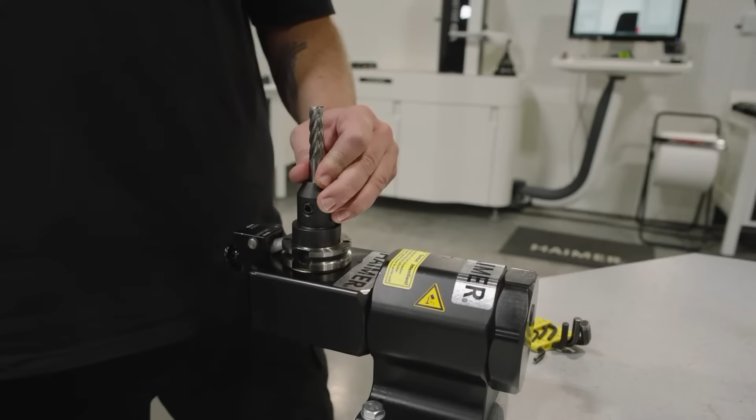Was it your idea to set up the station this way? Titans. Titans. So yeah, he was very specific about what he wanted, and I really liked what it did. Yeah. So you're getting this tool set up. Yeah, we're gonna go make some chips.

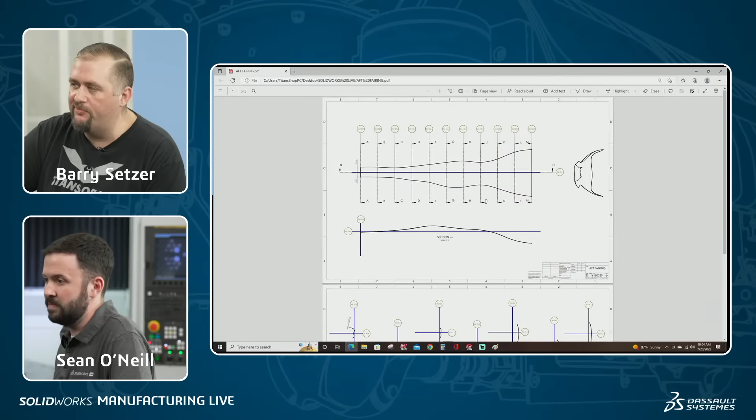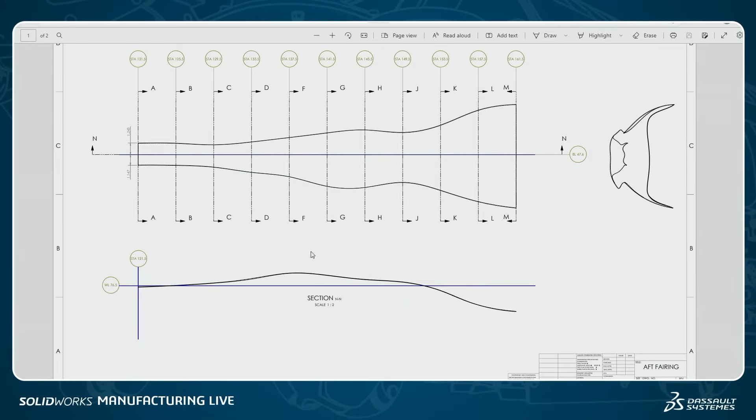If you want to take a look at a typical aerospace drawing for a pure contoured part, you have all these sections here with very few dimensions. They'll give you three planes: a waterline plane, which is the distance from the tarmac vertically; station planes going down the aircraft horizontally; and butt line, which is from center of aircraft outward. So it gives you planes that define where the part ends up in space, plus a bunch of section views - it's all curvature, so how do you model that without taking thousands of measurements for every little arc?

I did a part that was very similar to this - I've probably done hundreds of parts similar to this. In aircraft drawings, they'll usually give you something to scale the drawing. In this case, we have a grid, with station lines that are all 4 inches apart. So they gave us enough information to model this part, even though it's an undimensioned drawing.

It's crazy - some drawings I've seen, and some you've showed me, are 40, 50 years old. It can be really hard, right? It's like I can't access the person that made that drawing initially. I wish I could, and there's such an abundance of crazy amounts of information.

Dude, 50 years ago the FAA had very different standards than what they have today. So there have been huge assemblies that I've modeled, and then you find out that none of the parts go together the way that they were drawn. It's like, well, how have you guys been building this aircraft for 50 years? And it's kind of neat because at some of these aircraft companies you can find people that worked there 50, 60 years ago that still work there.

I remember one time in particular I was doing a main landing gear door assembly, and I went out to the shop and there was this guy still working in the hand forming section. I said, hey man, these parts don't go together, how do you guys make this work? And he's like, well, we've been hand trimming those ever since this drawing came out. It's like, wow, okay, glad I caught you.

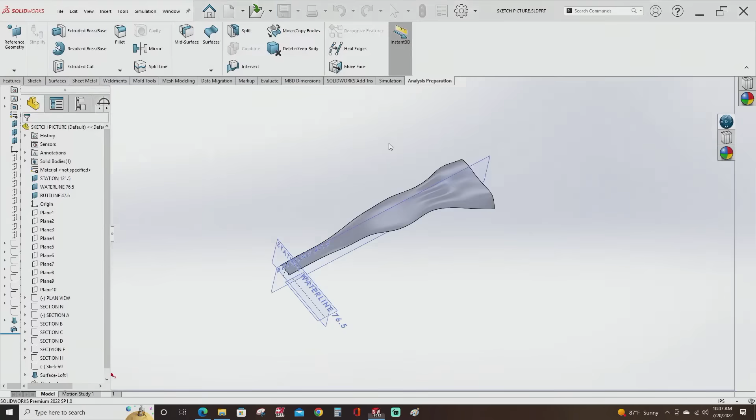One of the tools I like to utilize for a drawing like this is sketch picture. So if we open up this part here, you'll see that it's got pretty crazy contour to it. Yeah, it'd be very tough to model this unless you had a point cloud or a bunch of loft data you could use, but that drawing didn't have any of that.

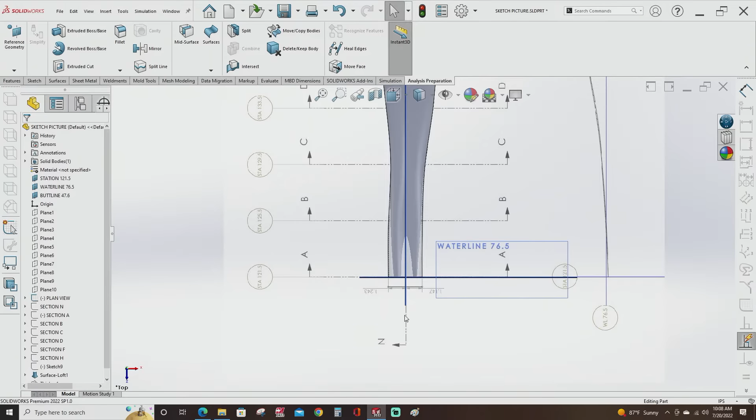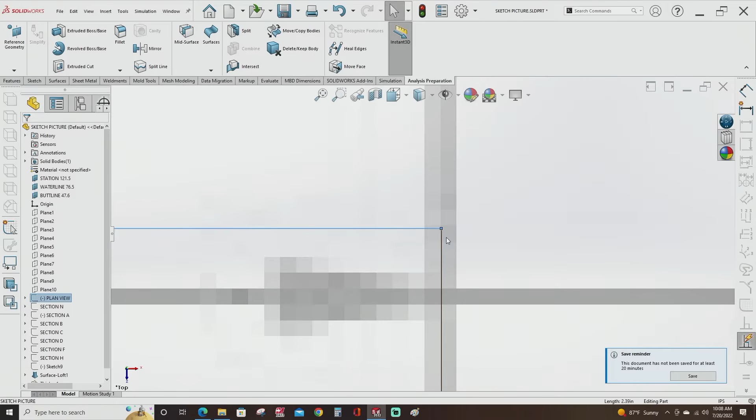So if we take a look at our plan view, the very first thing you have to do is get that drawing scaled perfectly. So we bring that picture in, but there's no telling if it's tiny now or if it's gigantic. Using these two dimensions that we had on the drawing, I just drew a sketch, dimensioned it, and then scaled the drawing to match that. You'll notice a lot of times dimension lines on a drawing will be 2 pixels wide, so what I almost always do is go to the center of those 2 pixels, and that hasn't failed me in maybe 20 years of doing this.

That's interesting. So you'll see here we got our first scaled version of our sketch picture. All we did was scale it, and this is just going to be kind of a checking tool to make sure that we got the outer contour of our part correct.

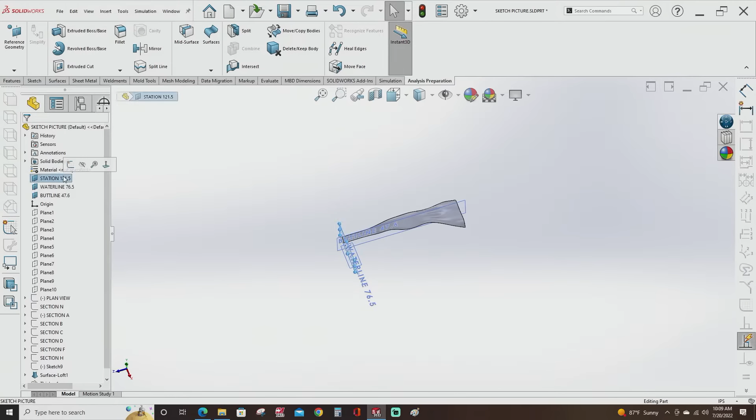I noticed you have a couple things from a Solidworks standpoint, like a lot of people, I like how you set this up, you seem to be very organized. It's like all my planes, but even further, right? The system-defined planes, like the 3 you have right up top above the origin, you renamed them. Are those dimensions you have there? Those are the 3 planes as defined by the drawing. So if you look, station 121.5.

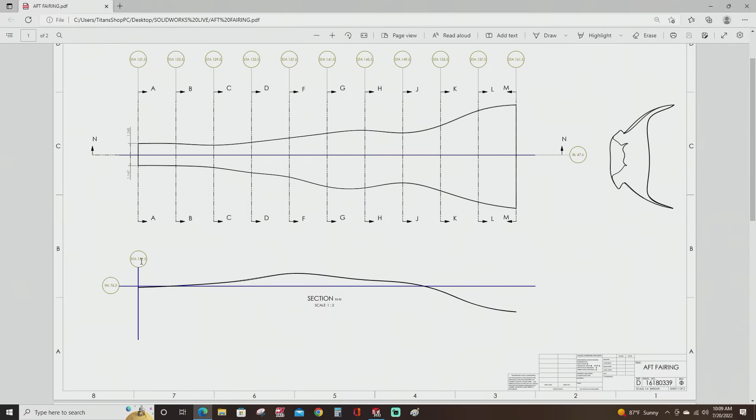That's going to be the station that defines the front end of our part. And then the same thing with the water line, 76.5, that's used in all the sections. And the same with the butt line, used in all the section views. So by naming those planes to follow the drawing convention, now we can mate those up in 3D space.

Okay, that makes sense. And most people that model aircraft parts will do that. They'll define the part in space where it ends up on the actual aircraft. And that's for saving time, as you start building assemblies of an aircraft, you want to just drop it in. Yeah, you drop it in.

In this case, that's not as important because we're just doing a single part for the sake of building a hydroform tool. It's probably one of those things, though, right, where you just kind of build it in. It's like, well, I have to orient this somewhere. Yep, someone's going to do it the same way. Yeah, and you might as well because there's no telling when down the line somebody else is going to use that model for something else.

Yeah, and I've done that before, where I took shortcuts and just kind of threw something in space, and then later somebody's like, 'Hey, why'd you do this?' That's a great tip. And I did do things a couple different ways in this model just to kind of discuss the different options that you have.

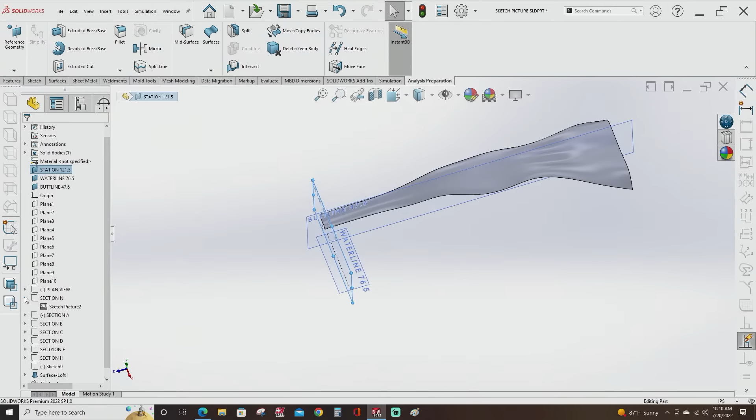So if you take a look at, say, section NN here, I don't have any actual sketch in this sketch, just like a holding place for the sketch. Right, okay. And a lot of times I prefer to do it that way because I don't want to accidentally change the scale of my sketch picture. So I'll create a sketch that only has the sketch picture in it to scale, and then I'll do another sketch later that has the actual contour geometry that I want to use. That's really smart.

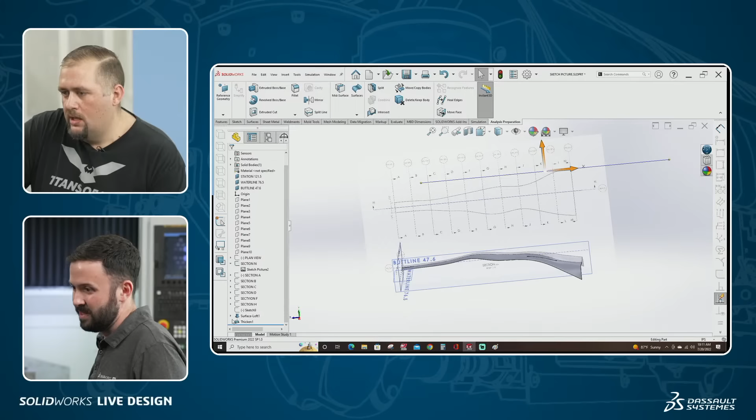So you can see that each of our defined planes in the beginning line up to our station lines on the drawing. So for each section view now, we have a plane created that we can drop a new sketch picture on, and our section view of that particular station line.

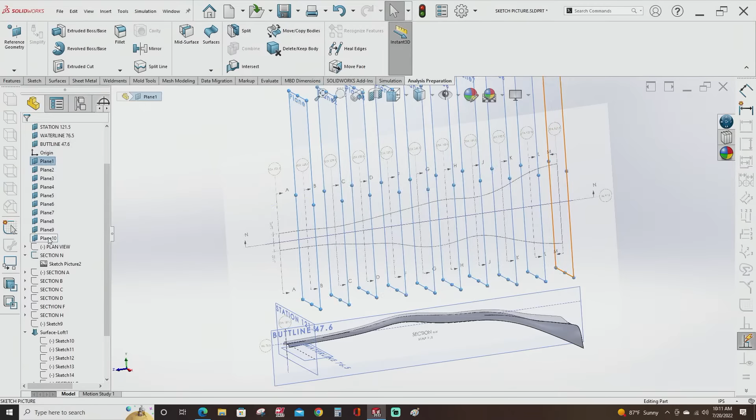Now we start digging into the actual loft of the surface that we created. We can just take a look at all of these sketches, and you can see that for each section, we have a sketch.

Yeah, so are you grabbing, like, are you taking the detail views of the different sections? Yep, so if you take a look at the sketch picture that's related to that sketch, you can see that I brought in another sketch picture, if I can figure out what view I'm in. And so for each section here, I have a different sketch picture.

Okay. And so it's moved around in relationship to where the part ends up in space using that butt line 47.6 and 76.5 water line.

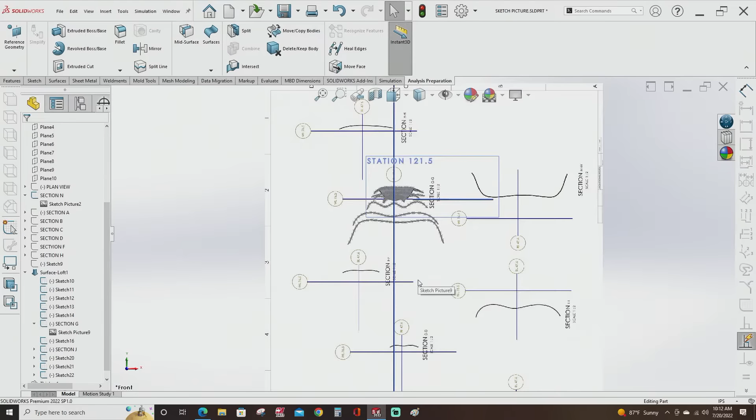So a lot of people may end up using sketch picture for maybe one or two views of a part. With aircraft, when you have a part that has 100 section views that are all undimensioned, you can bring in 100 sketch pictures and move them around however you need to. And it's really nice with aircraft that they give you those 3 planes to be able to orient things perfectly to your origin. Yeah, you're right.

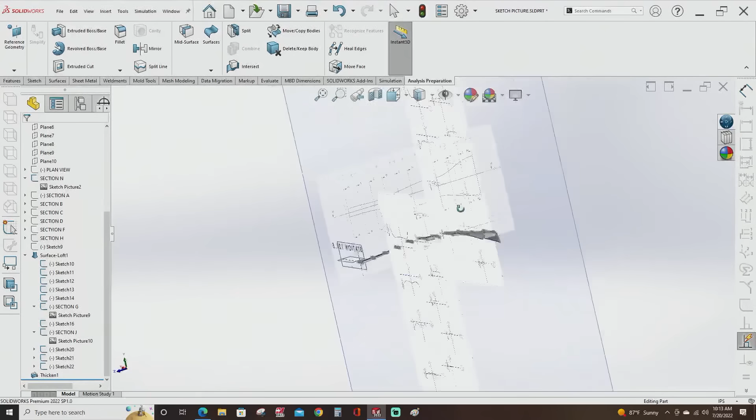Typically, like when I've used sketch pictures, there are a lot of cases where it can suffice, but we can see it, we saw it especially at the very beginning, like the finished part, without the sketch pictures and everything. Like you said, there's a lot of detail, how the curvature changes along the different sections. It's super intricate, so that just wouldn't suffice in this case.

Right, and with aircraft sheet metal parts, it's so easy to be able to do this because 9 times out of 10, the tolerance that they give you on these is like plus or minus 30 thousandths, and that's visually with an inspector laying the part on a Mylar. So if you're off by a thousandth or 5 thousandths or something, it's not going to kill you. And then you also have hand-forming departments, like I said, the little shoemaker's elves that come out with their little pieces of rubber and smack the sheet metal into shape.

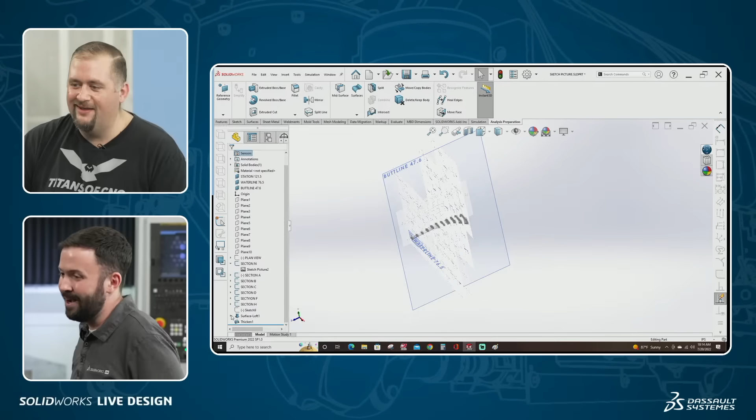Even that detail, like we talk a lot on other episodes about how insights on how to make something in SolidWorks are always really useful, but getting that career insight, especially for someone who's starting off in the trades, you may have an idea of what an industry is like and how things get made, but oftentimes that doesn't match reality perfectly. No, you might find out that you were completely wrong. You might have been completely wrong.

And I mean, it's kind of funny when I think back to when I started my career in aerospace, because at the time, I thought I was good at SolidWorks, right? And then I got into this first place and come to find out that I had a lot to learn still. I mean, I wasn't very mature in my surfacing skills, and there was a lot left to learn.

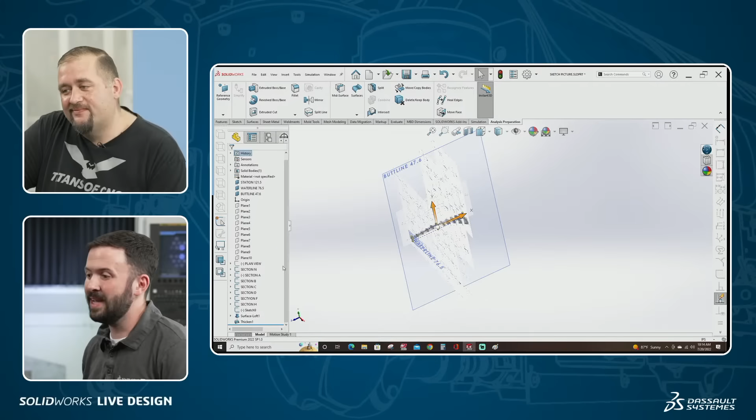And so even today when somebody says, oh, Barry, you're a SolidWorks champion, you do all these complicated parts, it's like, yeah, I would say that I am decent with SolidWorks, but I'll never say I'm good at it again. It's hard to say that, right? It's hard to say that.

Like we were talking about the Dunning-Kruger effect the other day. When you first start off, it's like, yeah, I got my CSWP, I'm awesome. But then you start making things at different companies, different industries, and you get to see that there's such diversity in terms of how different parts are created, how different industries do things, different users that have different techniques of doing things.

Yeah, like we were talking before the stream started, and if you've gotten your CSWP surfacing certificate, give it +1 in the chat. You're saying that was the hardest exam that we've ever taken, and even then, I still feel like I could learn a ton more about surface modeling.

Absolutely, and like we mentioned before the stream started, those certification exams are so good for teaching you things that you didn't know going into the exam. So you may fail an exam the first time you take it, but what you learned in there is so valuable later down the road that it's totally worth taking the exam.

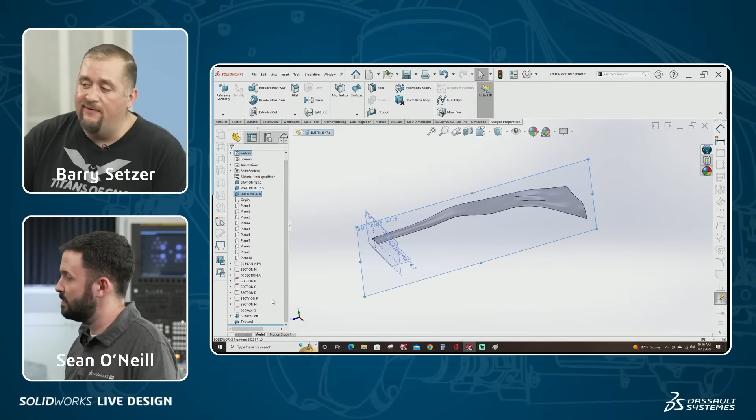I feel like there's several holes even within the aerospace industry for people that are capable of creating aerospace forming tools, things like that. And that's something that I have done a ton of. I've probably created thousands of models for hydroform tools and coining dies and press brake tools, all to form aircraft sheet metal parts. And it's tough to find other people that know how to do that. Even at some of the bigger aircraft companies I'll go to, no one in their engineering department knows how to do it. There may be one or two programmers that know how to do it.

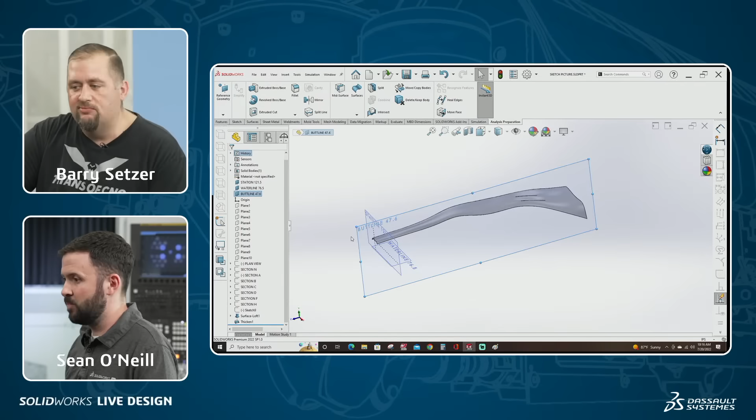And so I'd like to talk a little bit about that today, and get into a little bit of the surface modeling, in addition to what we just did with sketch picture. For sure. So there's a few different things when it comes to lofted parts that you may get. You may get the undefined drawing like we just had, undimensioned. You may get loft data, which comes sometimes in the form of a book where it just has a bunch of XYZ coordinates and vectors for angles and stuff.

You may get hand-drawn overlapping lofts, like for things like the wing loft, where it looks like just a constantly decreasing teardrop shape. And I've worked with every different type of loft data that aircraft uses.

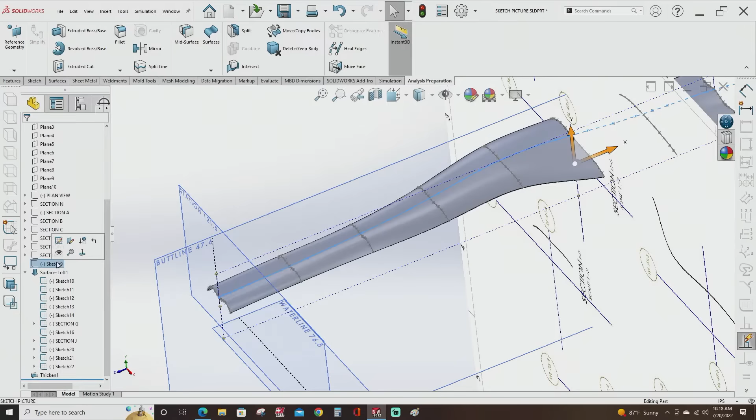And just here, Barry, before we move on from this part, because I was looking at some of the profiles that you had. So once you have the sketch picture and the different sketches as a holding body, that loft is comprised of a bunch of splines? Yep, a bunch of splines. There is a guide curve down the middle. Okay. So that's how it stays centered.

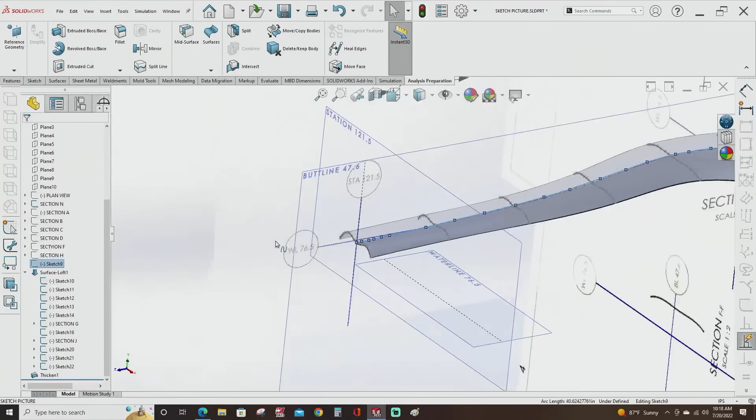Yep. So if you take a look at, there we go. I think that's section N. So if you take a look at section N, that gives us the guide curve to kind of tie it all together, and then the individual sections. So all we did was create a lofted surface using that guide curve and these splines. And then from there we just thickened it, which it gives us on the main view of the part, or I think on one of the section views.

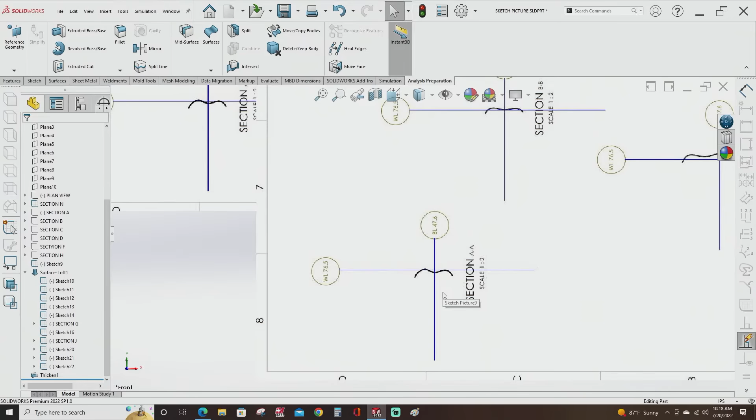Cool. One of our user group leaders, Steve Calvert, asked: how do you align the planes from the sketch picture? By using the waterline, butt line, and station lines that are on the drawing. That's kind of the reason the original engineer gave you those, because you can use where they align, centered here to your origin, which is exactly what I did. Let me hide some of these.

Isn't that great when we can prove that we're actually live? Can't fake that.

Oh, let's see here. Let's do section. Let's take this one.

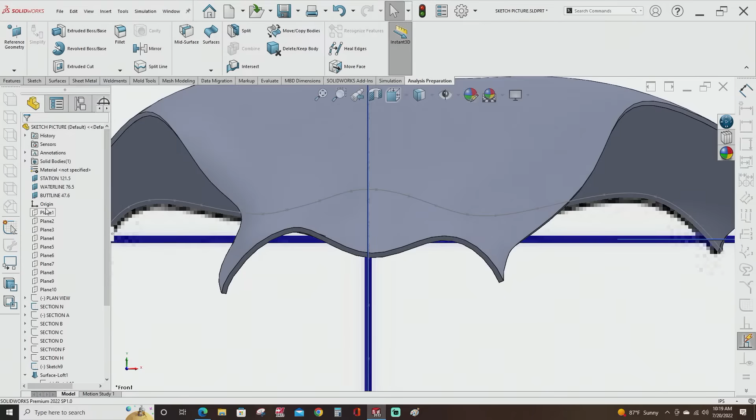So if you take a look at where those two planes in our section view align, and again, we're using the center of the 2 pixels for the dimension line, you can see that our origin ends up being right there at the center of those 2 planes. Gotcha, I see that. Yep, so for our waterline and butt line direction, we're aligning it to the origin, and then we have a plane that's perfectly aligned to the station section view.

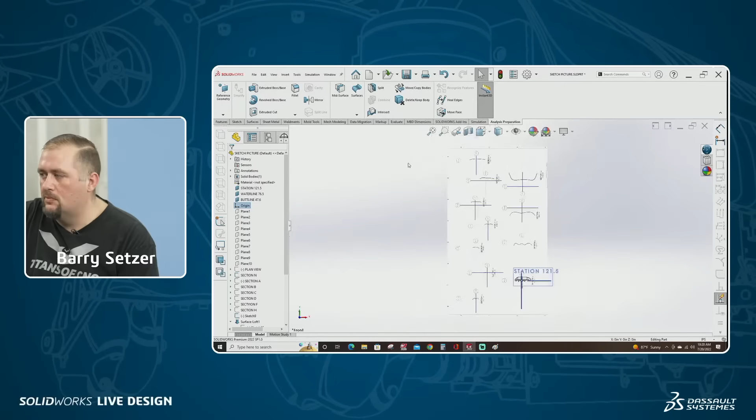And then in terms of how you thicken this, so you're doing a loft, and then you said you have the guide curve right in the center, right? Yep. So in terms of how you thicken, are you going both sides, or what are you doing? What I tend to do is I will pick either the upper contour or the lower contour. Okay. I kind of like to go one direction, and it's probably just personal preference, but usually when I'm creating a model like this, it's going to be for a forming tool, and so I kind of like to keep my part in one direction, then the lower die below that, and then the upper die above the part. So it's just personal preference. Personal preference. Cool.

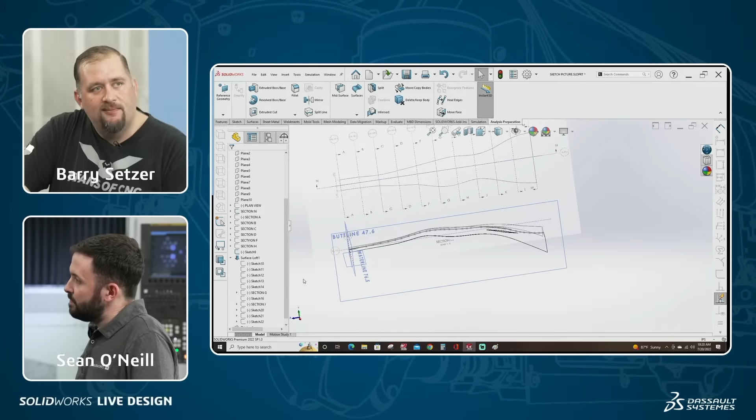Yeah, this was awesome to see your approach. Yeah, and this is something that you can use in more industries than just aircraft. Somebody and I were talking earlier about how they've seen the same type of lofted drawing in the marine industry, and I haven't done that much with shipbuilding, but it's useful elsewhere.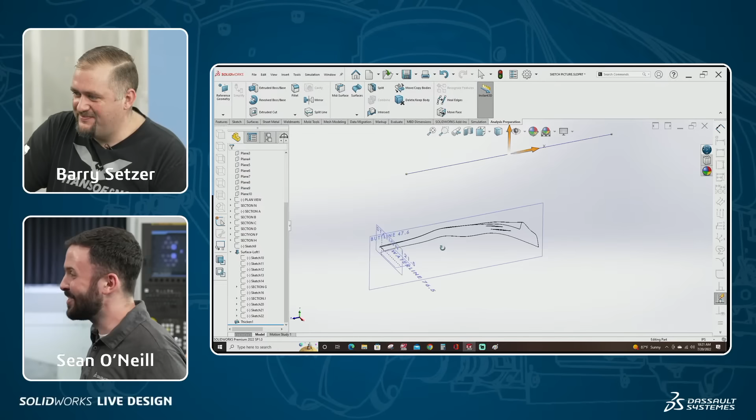Yeah, I know Matt Clay, he's roaming around here somewhere. He could probably tell us a bit about it. Yeah, he was actually who I was talking to. Oh, so it's like, oh yeah, I got that from our little trip here. Yeah.

Cool. Yeah, and there's a lot of other things, depending upon the available technology at the company that you work for. They have scanners that can take a Mylar drawing and scan it in, and then you can stretch it and go raster to vector, and then you have sketches already. You'll have inspection departments that can take a Romer arm to an existing part or tool and give you a surface model, or take their Creaform scanner and scan stuff. But you may not always find yourself at a billion-dollar aircraft company that has all that technology.

You may not always. And a lot of times in a machine shop, you won't have access to that, because your job is to make a specific part, and you get the bare minimum data. A lot of times all that's left is whatever they drew by hand 40, 50, 60 years ago. So yeah, it's good to know all the available options to you and to know how to process each of these different types of loft data. Absolutely.

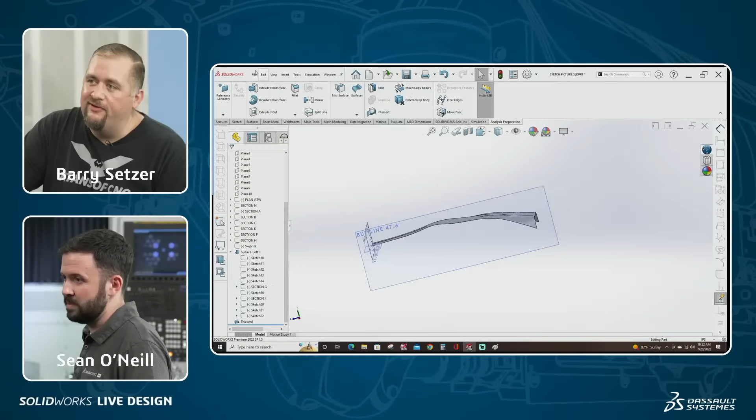Now, one that's always been kind of fun for me is working with point clouds. Yeah. Sometimes an inspector or an engineer will end up giving you way too much information. So whenever I have somebody scan something for me, I usually tell them, if you give me a point spacing of like 1/8 of an inch, that's usually sufficient. I don't need you to give me a point every 5 thousandths, because that's going to give me this gargantuan file full of points of insane size. You can hardly see anything. So there was a part that I did for the Navy that's similar to this. It was a similar situation.

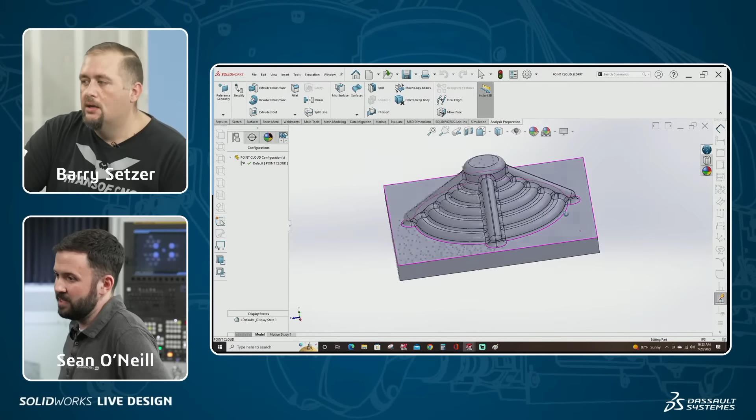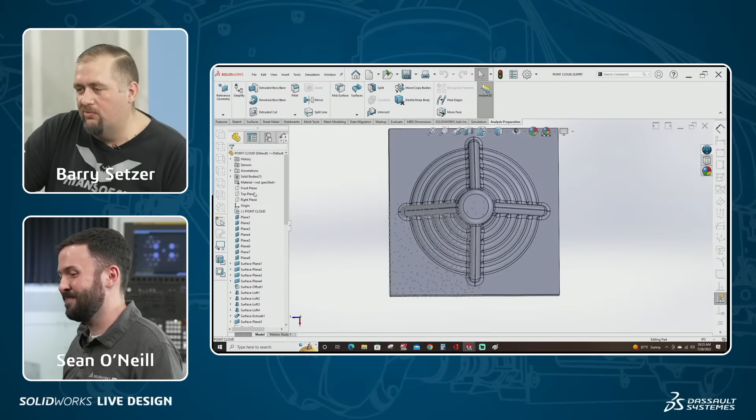Yeah, and this is something that comes up a lot too, right, across different industries. I've talked to so many different companies having to use point cloud data. Yep. It's a very, very common topic. Yeah, and again, it's one of those things where when you get into it in the beginning, it can feel kind of overwhelming, because it's like looking at the stars in the sky, right? Like, how do I connect the dots to make something real? And there's a few different approaches. The one thing I like to tell people is it's very helpful to have the actual part in your hand, because then you're able to take some dimensions to verify what you think you're seeing in the point cloud.

So, you know, you look at this, you can identify some structures, and you can see that, yeah, looks like we got some kind of rib here, another one here 90 degrees away from it. Looks like we're sitting on a square pedestal. And then there's these different layers. And what this part actually was, I forget the type of additive technology, but it's where they basically weld up a part on a plate, and then you go in and finish machine it.

So when I initially got this point cloud, it had a ton more points than what you see here. But because I had the part in front of me, I was able to verify that it was symmetrical. So the first thing I did was get rid of 3/4 of the points that were on screen. I didn't need them. All I needed was to take one quadrant. That helped keep my file size down, helped kind of simplify what I was looking at.

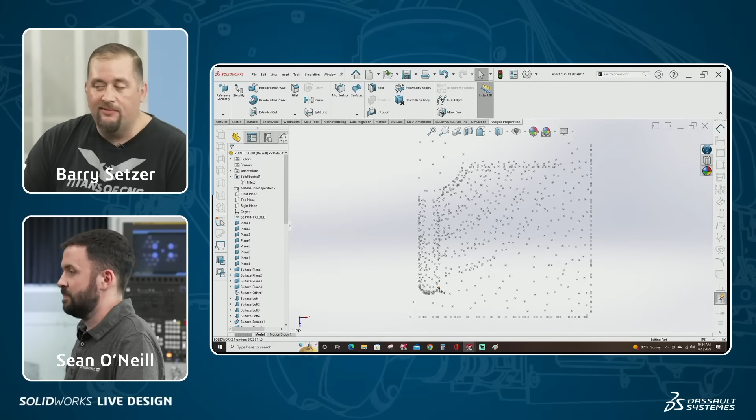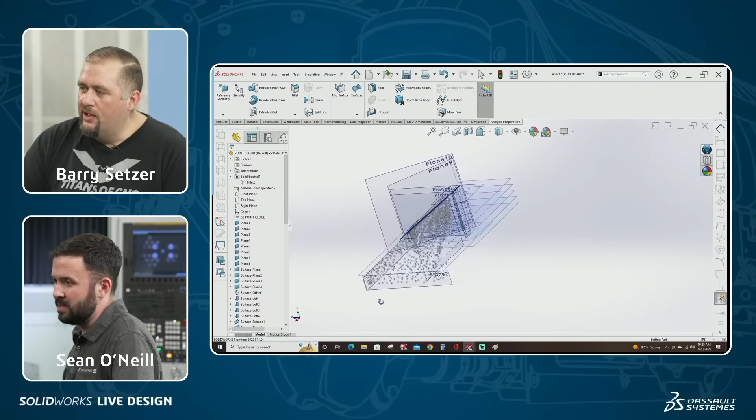And then from there, I was able to identify straight line features by looking at the part and by looking at the point cloud through different views. So as I did that, the first thing I started doing was creating planes. I knew that the bottom of the plate was square, so I came in and started defining planes using those points. And if I show all of our planes here, you can see between having the part and having the point cloud, I was able to kind of define where a lot of these planes were.

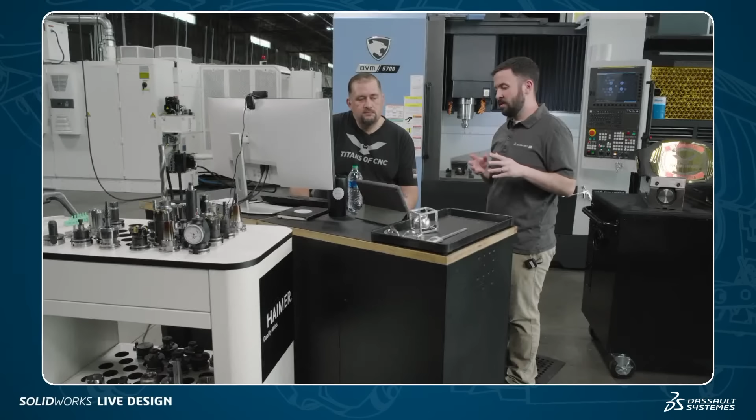There's an interesting question in the chat by Steven here. I think it was originally asked on the former part, but I think it's kind of a general practice question. So Steven says, fewer loft profiles and spline points can give a better surface quality, but you need the profiles to control the shape. How do you strike a balance? So it's an interesting question.

Yeah, something that I learned in making impellers is using an odd number of points will usually give you the best results. So I try to keep the number of points to a minimum. You can do things like create arcs and then using those arcs create your spline, use the arcs as construction geometry. That's a little bit more painstaking of a process. Usually with these lofted sheet metal shapes, you can get away with just using splines because it's going to go through the hand form department. The little elves are going to get their hammers out and get it into shape. But you're right in your assessment. I try to stick to the minimum number of odd points that I can get in a spline and get a reliable match to the contour of the drawing.

Yeah, for sure. I guess depending on what you're doing, with lofts in general, it's about trying to capture the unique profiles, right? Yeah. Along a transition.

So Bayram asks on this one, just while we're still here, can you show the loft parameters? I'm wondering about your tangency conditions. So let's do edit feature real quick to show that off. Okay, so merge tangent faces. Yeah, nothing fancy.

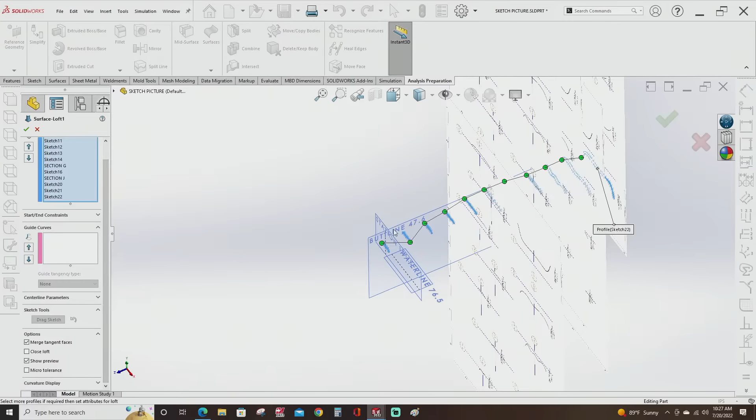And I'll tell you one thing that was kind of funny for me in the beginning when it came to working with lofts. I didn't know what these little balls at the end were. So I would get these weird twists in my loft, and I'd be like, "Why is it doing that?" I recall that too. And if a coworker would call you over and be like, "Why would this not work?" Once you knew, it's like, wow, I moved this little Pac-Man, and suddenly everything is beautiful. Great. My file isn't corrupt.

That's cool. Awesome. So yeah, I think we're good to jump to the next one.

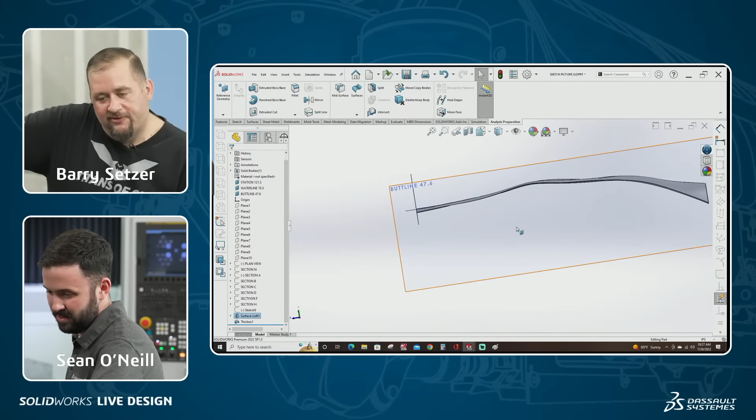I saw a question that I actually liked, asking what my favorite surfacing feature is in SolidWorks. And this was another discussion that I had earlier today. There were two things that really blew my mind when it came to surface modeling. And that was when I found out that you could do offset surface with a distance of 0, and all of a sudden it turns into copy surface. I had no idea you could copy a surface. It's like a cheat code.

Yeah, and that was so useful because there were a lot of times where I would be trying to trim a bunch of surface bodies together, but maybe a couple of those faces were part of the same surface body.

And then it's like, well, you can't extend me into myself or I'm self-intersecting. So you just create a copy of a surface, then hide the original face, or delete the original face. Now show your copied surface, and now you can do whatever you want to it. Extend it into all the other surfaces and then trim it up.

Man, surface modeling, surface editing tools are just so cool, and they're critical when you're doing things like aerospace parts and aerospace tools. The other thing was, when I realized why I was getting all these self-intersection errors, in the beginning, I didn't really know that a surface shouldn't intersect itself. So I would be trying to figure out how to knit a single surface body to itself to create a solid. And that's another time where copy surface came in pretty handy. You just copy the surface and now you got something that you can knit together. Yeah, right. So copy surface, I think, is one of my favorite tools.

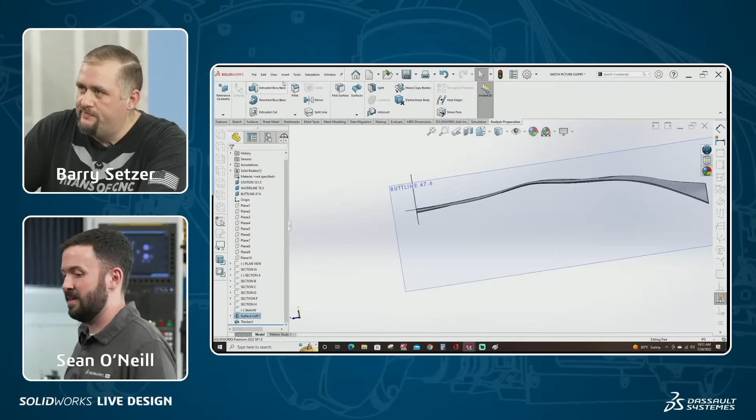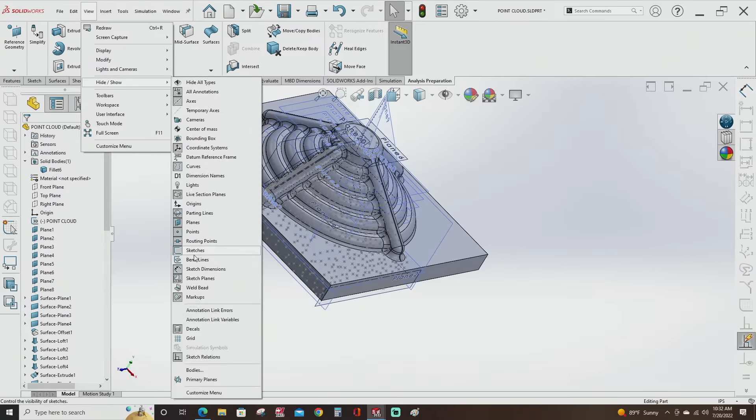So you can see from here, we got a bunch of planes defined, and using those planes now, we're going to start creating some solid features and some surface features. Show my solid body here. And I love what you said, Barry, when you first jumped to this part, about working with symmetry. There's so many areas where you can do that in modeling and running FEA. Oh, yes. That's especially useful in cases where it's applicable and it's not going to tamper your results. Right, and as powerful as the software and your computer hardware may be, the smaller you can keep the file, the more efficient you're going to be, the faster you're going to get your models or analysis done.

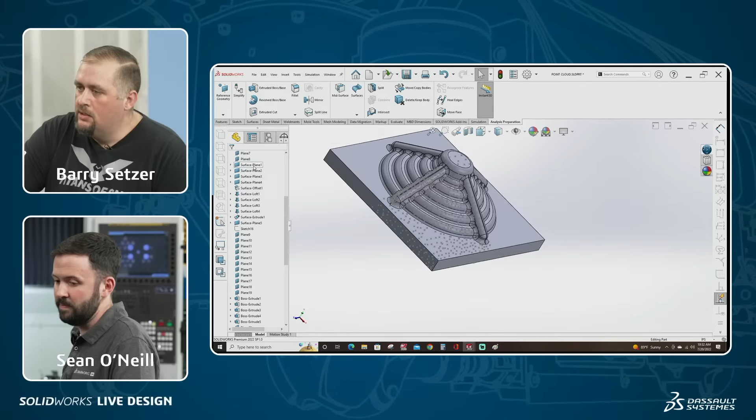Roll back here. So you can see to start with, the first things I did was, using my actual physical part, I created some solid boss features. These were just the layers of weld that they had built up to create this pyramid-like feature. That was easy because I was just able to take out a pair of calipers, throw it on the part and say, okay, I know where these are, and I know what size they are. And then started to make some surfaces using the planes that we had already defined and some of the points that we had defined. So we built some surfaces for our base here. We built some surfaces for our rib.

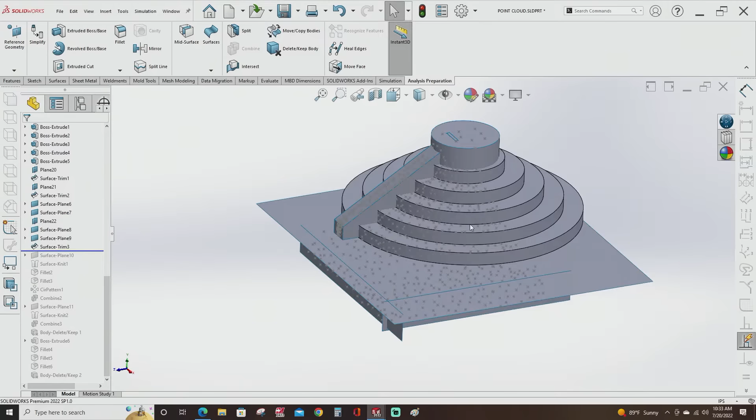So in terms of using, in this case, surface plane versus, you know, another guess that maybe how you could do this is just making a plane there if you don't have one already, and then just doing a sketch on the points. Is there a reason why, or is it just like I'm using surfacing tools, I'm in a mode of putting the faces together? I tend to get into modes.

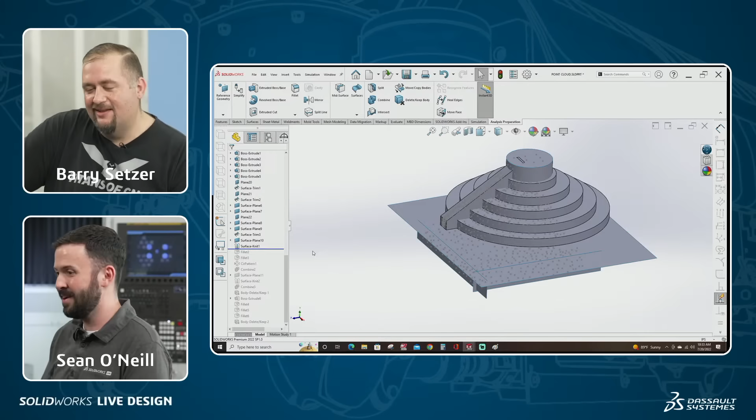So yeah. You guys watching may have 100 different ways of doing what I did, and none of those ways are wrong. If you ended up with the same outcome as I did, you did it right. It's a good lesson. Now some of us will get it done faster, some of us a little slower, but the longer that you're in SolidWorks, the faster you get.

Sure. So there's a lot of little things that I do super fast, where if someone was just starting our academy, say, I would not teach them to do it the way that I do it. I'd let the academy do its thing, because the way I do something makes sense in my weird, twisted brain and in my experience. But for somebody just starting out, I may tell you to do it a completely different way.

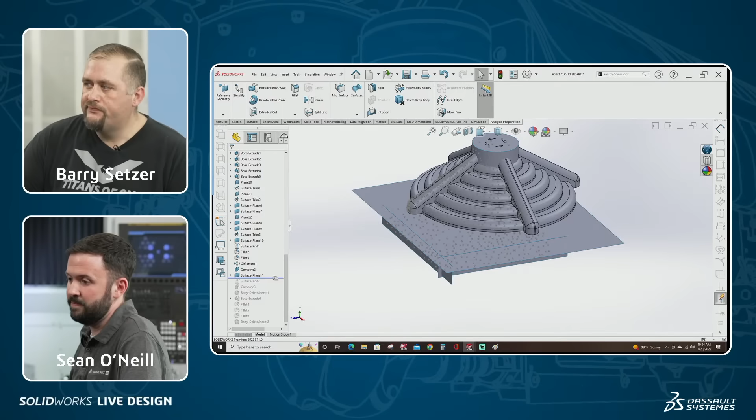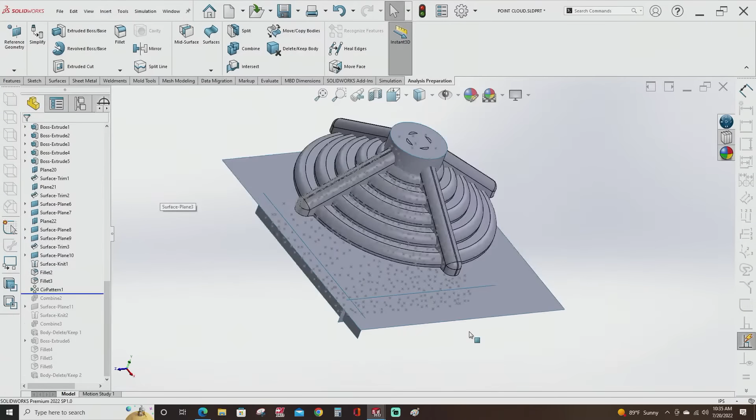Yeah, so looking at this, you'll see I got one of the ribs modeled. After getting it to be a closed body, we knitted it together, created a solid. I knew this rib occurred in all 4 quadrants, so then we just did a circular pattern. Then we combined our solids, came in and finished off our base, and put a couple finishing touches on. We got our fillets. Awesome.

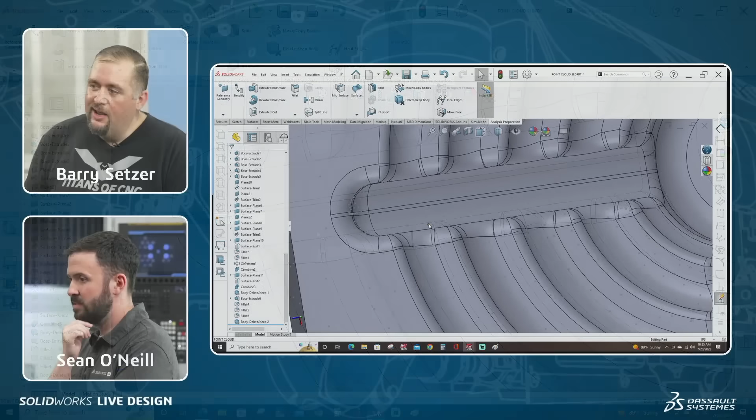So again, this may not be perfectly accurate to within a thousandth, but it was a welded up piece of material that was made to give us a piece of rough stock, so it was more than close enough for us to be able to machine our finished part from.

Sure. There's a couple of good questions here in the chat. So Mohammed asked, how do you deal with complex designs? This is a good one. Very general purpose too. Complex designs that need to be modified all the time, and every modification in every part of it affects the rest of the surfaces.

So I suppose what Mohammed's asking is that case where, based on the way it's been modeled, there's tons of potential downstream ramifications in your feature tree, especially with a surface model where we're patching together faces, and that could be difficult. Yeah, so one of the things I've done with some of my more complex models, single part models that took me 6 months to create, thousands of features in the tree,

one of my favorite things to do is just save out a dumb solid and then bring it back in as an imported body, and now I can do whatever I want to it, and it's not going to affect anything from the past. You can start cutting holes in it, changing geometry, cut out chunks and change the loft between them. We used to call it round tripping. I know a lot of people say that. And I have a lot of models like that.

I'll have a model that has 4,000 features in it. Then all of a sudden I'll have another one that has only 300, and you'll notice the very first feature in the tree is an imported body. So yeah, it makes sense. I guess it comes down to a simple question of how is it serving, right? Because like you said, the rebuild time can ramp up, and our computers and the software are getting better. But a history tree is there to be able to go back and edit, and if it's not serving that purpose, then I'm not sure it's useful.

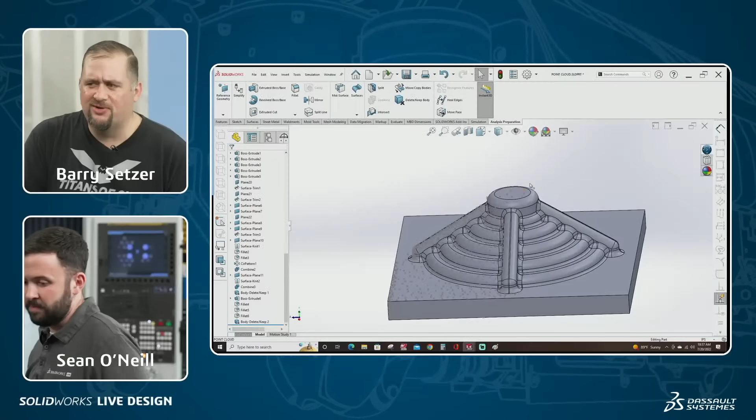Yeah, you definitely lose something when you do that. I mean, the history tree is like the greatest invention of all time, next to power trim. But sometimes you do have to sacrifice that for the sake of something you want to do to the model that you know is going to affect downstream features.

Yep, and Thomas was asking - Thomas here, also from the Champions program. How's it going, Thomas? What's up, Thomas? I've not seen Thomas in years. Looking forward to seeing you soon.

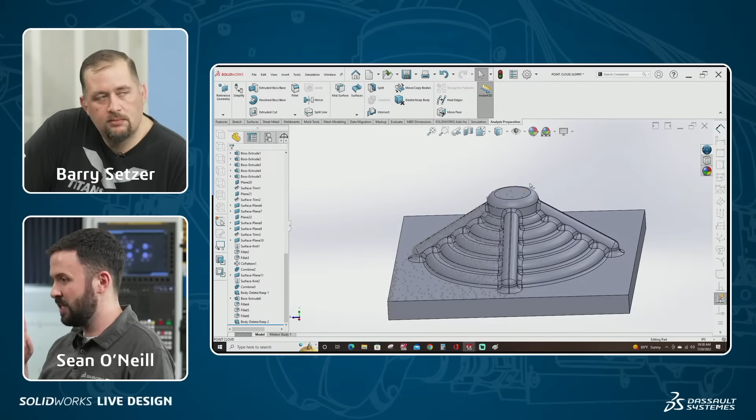Could you reference those bosses to the points? Okay, so I think what Thomas might be asking is, could it be a different approach - if instead of making a straight-on extrude for one of those more planar areas, could you do up to vertex on the boss extrude? Oh yeah, for sure, that's something you could do.

Really, initially building all those planes just kind of helped me visualize the part, because I didn't want to go in and start creating a bunch of surfaces right off the bat that I was going to have to trim later. As long as I was able to visualize what the part looked like in the beginning, that's what I was after. And yeah, you're absolutely right - even with the sketches of those bosses, I could have just done 3-point arcs and then gone up to vertex for the plane. So again, it's a case of having 1,000 different ways of achieving the same thing, and really it's just whatever makes you happy on that particular day.

Right, and whatever gets you to wrap your mind around it, like you said in the beginning - that's so important. Because when I watch you, or really anyone, go through a feature tree, you review how someone built something and you have that power of hindsight, where everything always made sense. That's right, but we all know some of that early stuff is just wrapping your mind around what your workflow is going to be, because that starting point is so important.

Absolutely - I'd say that's probably the most important 30 seconds of any model I've ever created, the 30 seconds where I sit there and stare at whatever design data I've been given. Sometimes it's longer, sometimes 30 minutes, but that is the most important time. And I can't tell you the number of times I've taken an incorrect left turn in the very beginning, then later on I'm like, oh my gosh, why didn't I do this other way? But usually by then it's too late and you just move on.

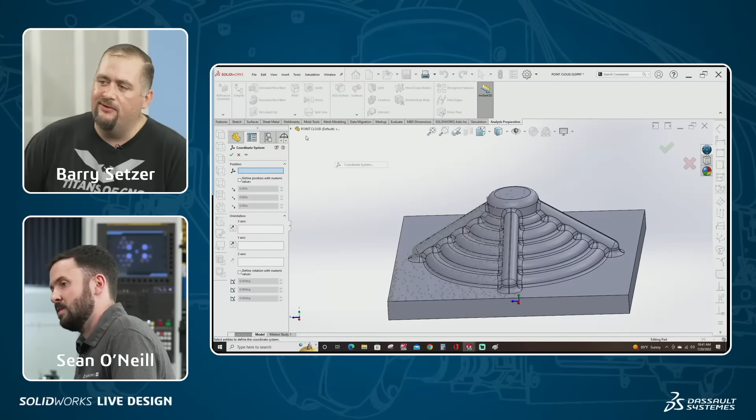So I make a lot of use of the reference geometry - the coordinate system. Now, if I create a coordinate system at just a random location here, and we'll say Z is this direction... and we'll give it an X too.

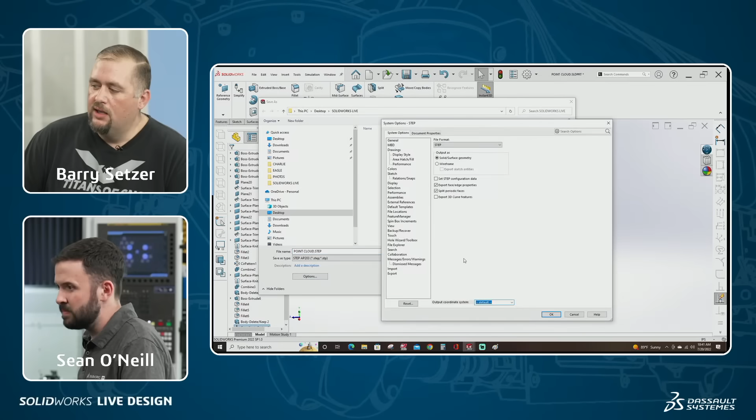When I go to save this out as, say, a step file or a parasolid, if we go into our options for, say, step file, you can now choose the coordinate system that you want that part to be saved out in. And that's really a pretty handy tool for those of us that are going to bring something in to be machined, because when we get into our CAM software, we want that part to land right where we want it to be and not have to translate it around.

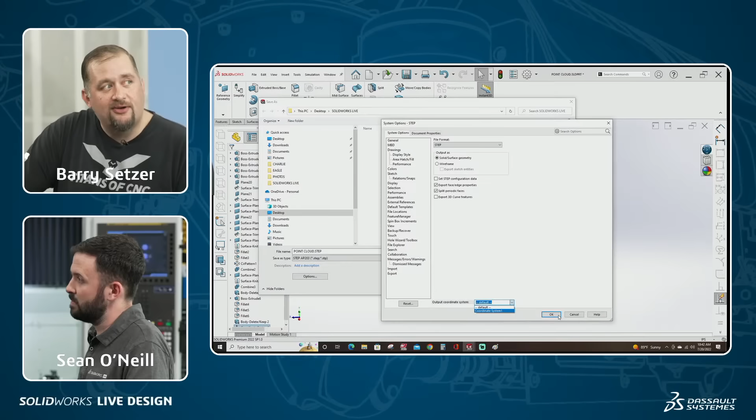I prefer to use CAD for CAD functions and CAM for CAM functions, so.

Cool. And I think Thomas asked, are your planes referencing the points or just dimension based on the physical sample? The planes themselves are referencing points. So if you take a look at, say, this one here, that one happened to be using a face that I was perpendicular to, but the earlier planes are using points, since that's all the point cloud had to reference. That was all I had, so. Gotcha.

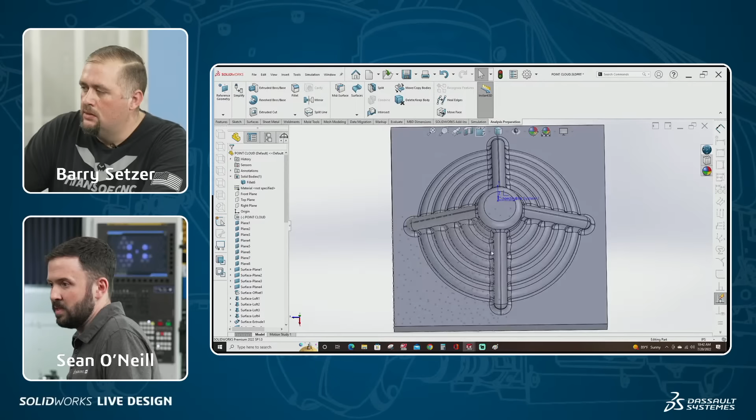Yeah, and it was a pretty cool part. You know, it's kind of neat seeing the way one company gives you this additively created part, then some other company gives you a point cloud of it, and you end up with this chunk of metal on your desk, and now you need a 3D model that you can actually machine, and it's like, all right, well, here we go.

I was reading a quote the other day from Nikola Tesla that said how Edison was the type of guy that if you told him he had to find a needle in a haystack, he would start picking up single pieces of hay and examining it until he found the needle. Well, it's kind of how point cloud modeling is. You have to focus on the fact in the very beginning that this is going to take you a minute, and then you have to dedicate yourself to that process, and then, in the end, you're left with a beautiful model that you can be proud of.

Yeah, it's weird. It's kind of like there's a bit of a mental pruning process, right? Because, especially if you have a lot of points, you have to sort of think about what is important, what's unique, and then how am I gonna use it? Absolutely.

Muhammad asks, this is just a pretty general question, like a manufacturing lifestyle question, but how can you achieve the 3 requirements of good design at the same time? Achieving the work required of the design, the beautiful look, and the right price.

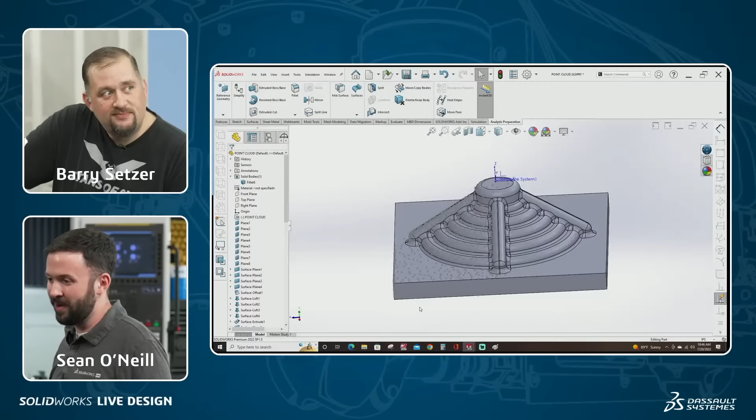Yeah, the knitting tool is crucial when you're doing surfacing. And that kind of goes back to one of my two favorite features about surface modeling, knowing that you need multiple surface bodies to be able to knit something together into a single solid. You're not going to knit one surface into itself. The copy surface tool, again, is another good one.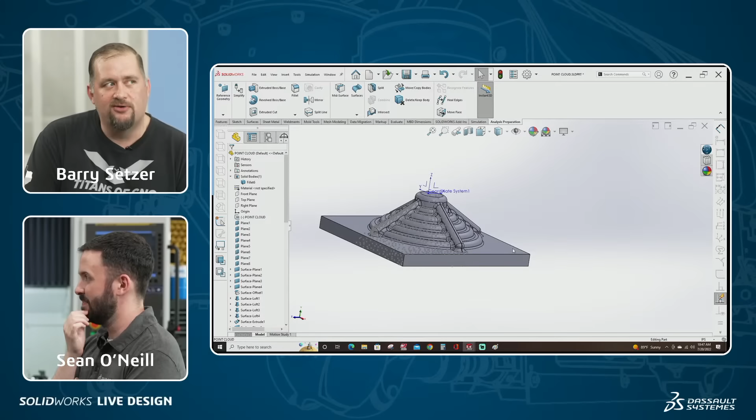I'd say for knitting, just making sure that everything is trimmed together perfectly is a critical component of that. A lot of times you'll have just a tiny little corner of a surface that's interfering. Solidworks has gotten a lot better in the last few years, and there's been a few cases now where I'll have something like that and it'll fix it itself when I go to knit it. That's made me very happy.

Yeah, but that can be huge. Like you're mentioning, the check tool, the imported geometry tool, especially if it's something where you're bringing in geometry, that can be maddening to a certain extent. It looks fine, it looks great, right? So using those tools is fundamental.

And that brings up another two favorite features: repair sketch and geometry check. Without those two things, I would have spent countless hours trying to figure out what was wrong with something that I did. But, like with knitting surfaces, I mentioned earlier how much I like copy surface.

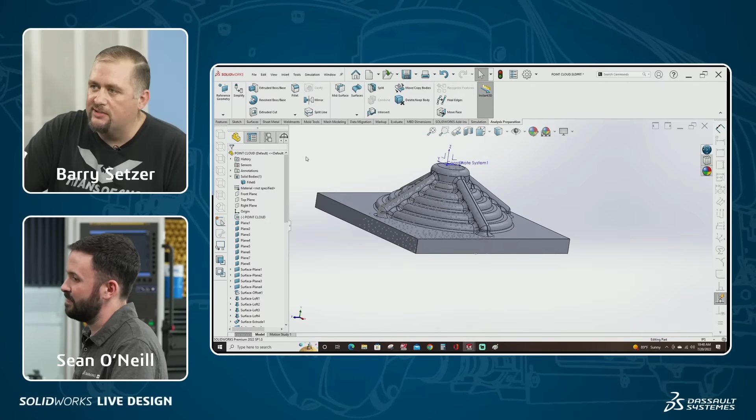So here's something that I do a lot when I'm surface modeling, and it may seem kind of self-evident, but it really isn't unless you're used to creating surface models a lot. So within the surfacing workbench, we have offset surface. Say I wanted to get rid of this face and do something different, or there's no telling what I want to do with it, but I'll create an offset surface of that at an offset of 0.

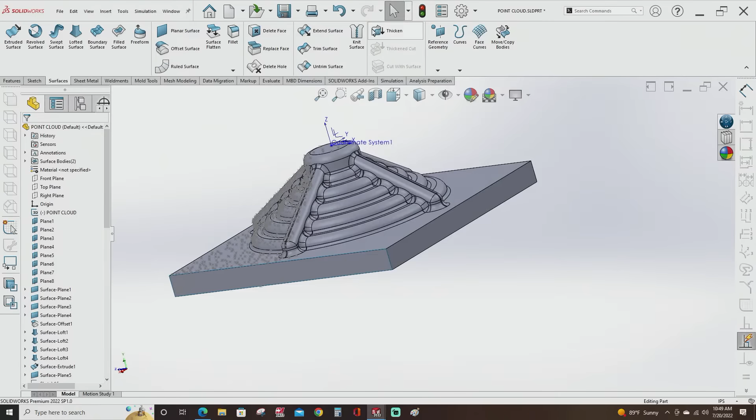So now I have two identical faces on top of each other. I'll go hide that offset surface that I just created, and then go into delete face, get rid of the old face, and then I can show my offset surface. Now I have two separate surface bodies that I can now knit together to create a solid body, back to a solid again.

So it's kind of a cheat, and there's a lot of specific cases where I'll use that little technique, but I can't think of an applicable one right now. But just keep that in your toolbox, and later you'll find a use for it if you're doing surface modeling, guarantee it. Yeah, and a solid, just at a fundamental level, is just a collection of surfaces.

It's watertight, and it's considered together, it's filled in. But really, just an example like that, if you're not really used to surface modeling especially, there's a lot of use cases for that kind of thing, but it shows you what you're actually dealing with. Yep, and how to use the specific tools that you want to get more familiar with.

It's interesting too, the knit tool is sometimes important to use, and sometimes you have to use it. And even within some of the surfacing commands, they sort of have those merge commands within them. That depends, I guess it depends on the person, because there's always an argument. There tends to be similar arguments with writing computer code, or if you're doing 3D modeling, where it's like, how am I going to design this or make this, in its tree, its history, for editability later?

Right. So I prefer this. Even if you could have done, and I don't think in this case you could have, but even if you could have done one of those additive surfacing commands or trimming commands to merge it, I just look for that surface knit feature in the tree, and that way I know how to go back to it and go before it or whatever I want to do. Yeah, and again, it goes back to a lot of personal preference.

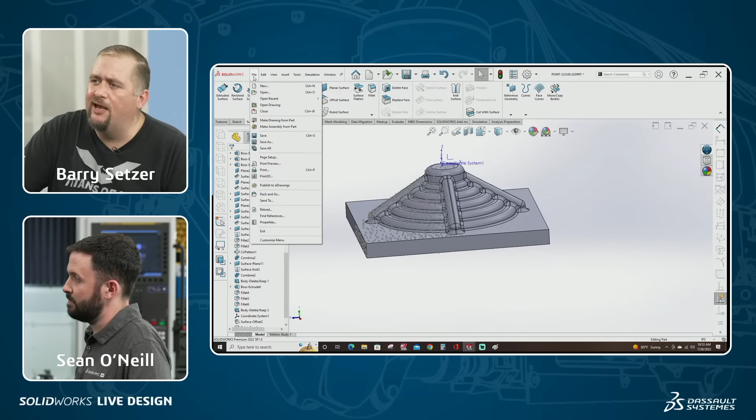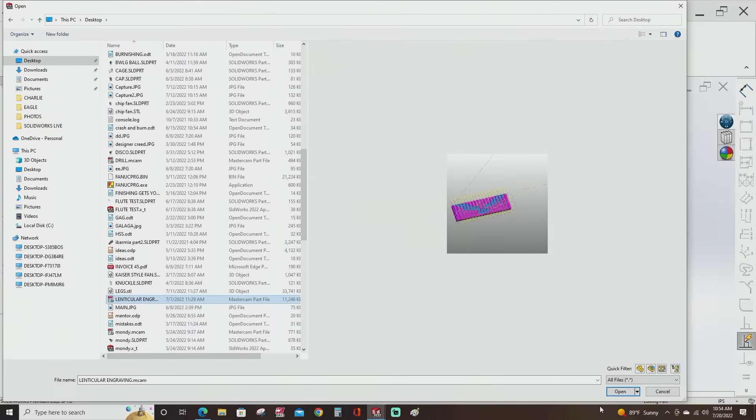I saw Timothy asked about touching on the split tool. Okay. Mold tools probably isn't my strongest workbench, but I do use split for quite a few things, especially if I'm splitting a surface, trying to remove a portion of a surface. A good example, I don't know if you saw on Facebook the other day, where do I have this hiding? Figures. Oh well, can't find it, but it's extremely useful because you can use closed profiles to create a split feature, or you can just use single entities like a line.

And so if we go back to, say, our sketch picture part, come on, you. One of the things that I like to use split feature for is if I'm doing engraving on a part. Okay.

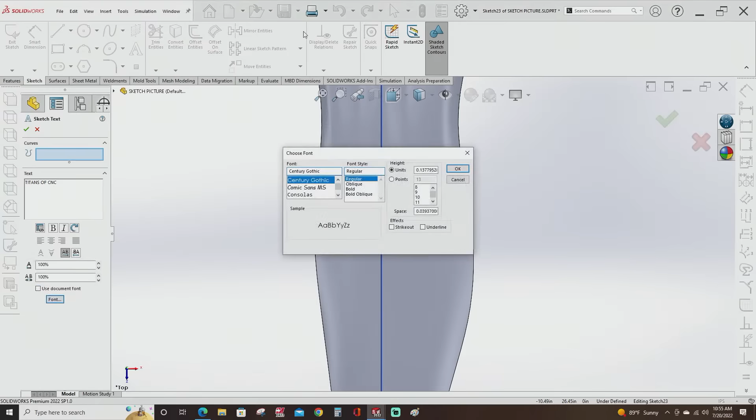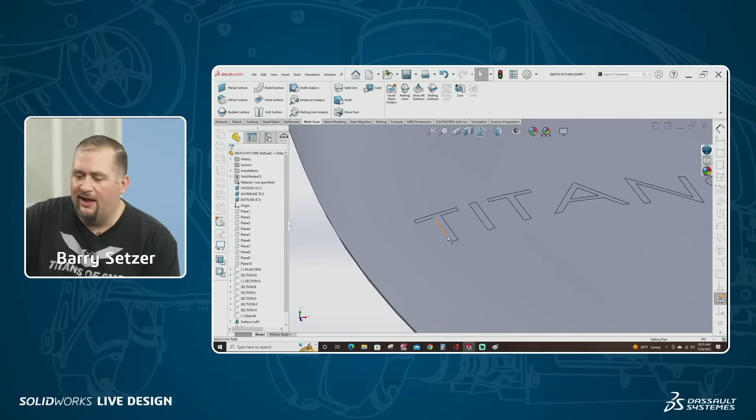And what that allows me to do now is I have that line that I can follow in my CAM software, and it's at the same exact level as my surface. So it's not a cut that's going in, and it's not a boss that's coming out. So now I can control the depth of my engraving just using the CAM software and a ball end mill or whatever I want to use. So that's probably one of the things I use split tool for the most.

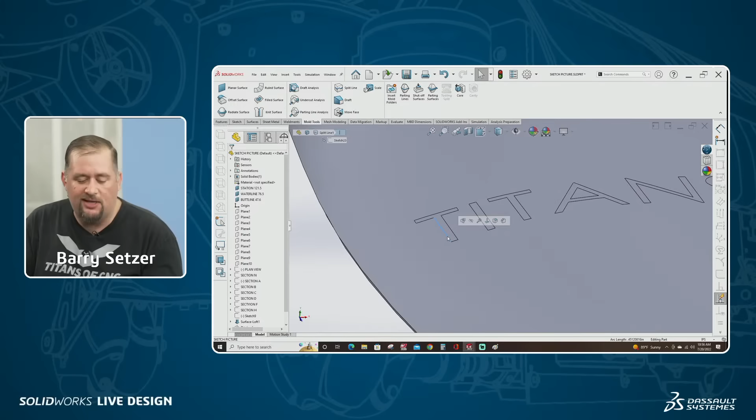Unless I'm getting into designing hydroform tools, where one thing I do a lot is creating tooling tabs on the actual sheet metal part itself. So if we were to, say, do an offset surface, I'll come in and extend the end of the part by, say, an inch.

And just another little pointer, usually before I start extending the surfaces of a part, I'll create a 3D sketch and then convert all the outside entities of that body. That way I have that to reference later. So as I start extending things, I still know where the edges of my original part were.

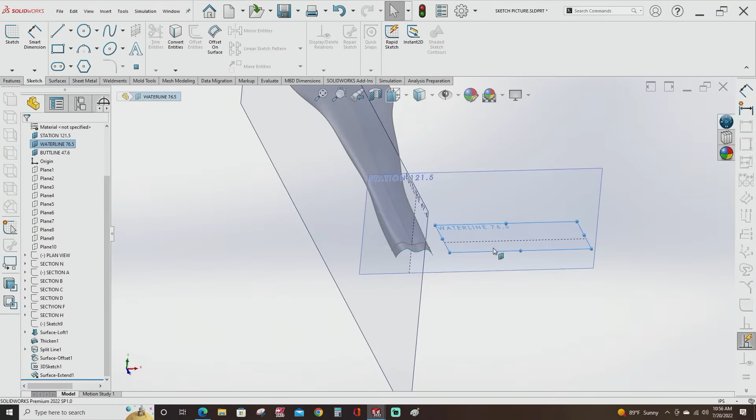I love taking those reference captures. Yeah, me too. It's so useful.

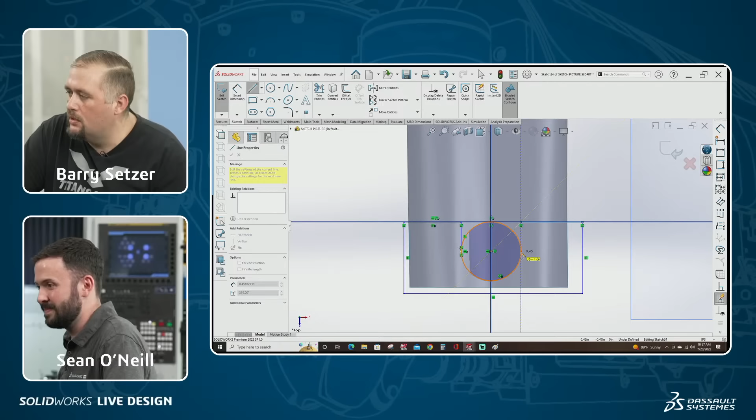And so now out here, past the original end of the part, I'll create a tooling tab that can be used to put a tooling hole in for locating the sheet metal part to the forming tool. Close profile for that.

Cool. So now that I have that face split off, I can just delete that face if I want, or whatever we want to do. But I end up having that tab that I can then put a hole in, and now follow the same shape of the surface. And that's awesome. Yeah, they could do a lot of stuff with that.

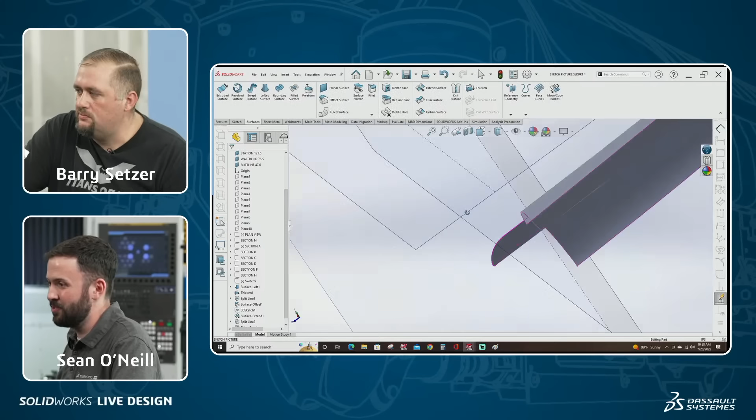Super cool. Yeah, so hopefully that answered some of your questions about split tool. It's not something that I use every day, but it's something that I've used a lot. Yeah, absolutely. Awesome. I appreciate you asking that.

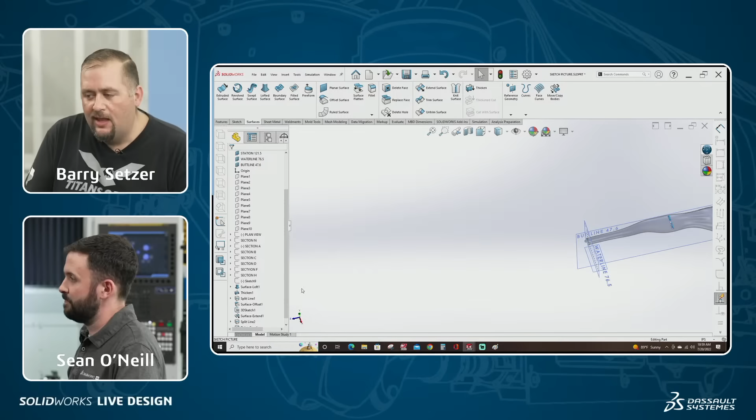And so there's a lot of teams that I've worked on where I've been able to create a 3D model of a part faster than, say, half of the rest of the team. So whenever they need a complex model done, they'll hand it off to me. I'll knock the model out as fast as I can, and then they're able to work on something else that I was working on before. And so in that way, you grow as a team.

And I think SolidWorks is one of the most powerful tools I've used in my career. I remember when I first started using it, it blew my mind how much of a difference it made in my day-to-day work. And I've never forgotten it. I've never looked away from it, and I'm so happy to still be using it today. And it's even better now that I get to teach other people the tricks that we've learned through the years, and have such an awesome forum to be able to do it and answer live questions and just be a part of the amazing SolidWorks team.

Yeah, it's crazy. I'll tell the full story of how this partnership came together, because I still love to hear it, and I was part of it, but I'm sure you guys will too. And man, again, I just can't say it enough. It is so cool to be here. It's so cool to finally meet you in person.